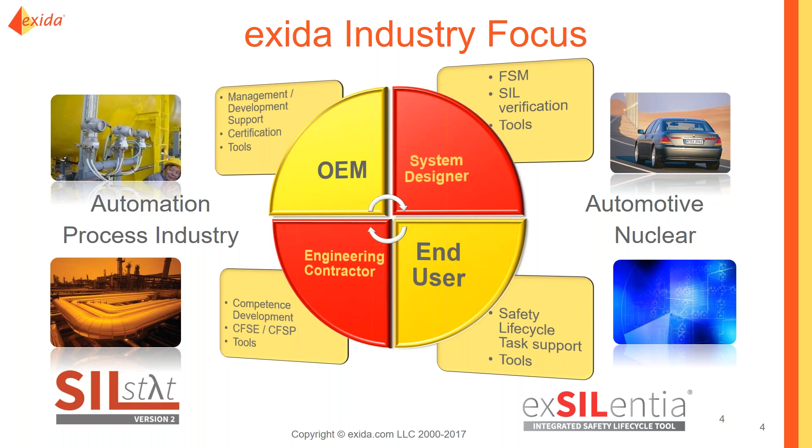We also have products that support the full safety life cycle with exSILentia, and help with the operations and maintenance side through SILSTAT. We also have 3 main service divisions that look after functional safety, cybersecurity, and alarm management. We've worked with a variety of different types of end users, OEMs, engineering contractors, etc., in a variety of industries.

We do provide a lot of information which is free. These webinars that we do is one source, and these are recorded and held on our website under the resources section. We also provide consulting services, the engineering tools, the certification, and training. We provide training in all 3 disciplines of functional safety, alarm management, cybersecurity, and we've also published a number of books and have white papers available, as well as our SERH, our Safety Equipment Reliability Handbook, that has all the failure rates for different types of devices that you would find in process applications.

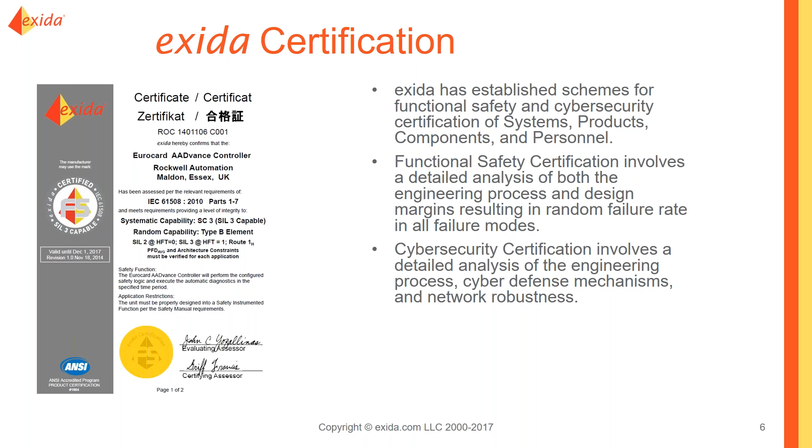We've established a scheme for certification for functional safety and cybersecurity, and that extends now not only to the equipment, but also to personnel, because we have the certified functional safety expert, certified functional safety professional, and now we've introduced the certified automation cybersecurity expert and certified automation cybersecurity specialist, which are equivalent to the CFSE and CFSP, but only on the cybersecurity side.

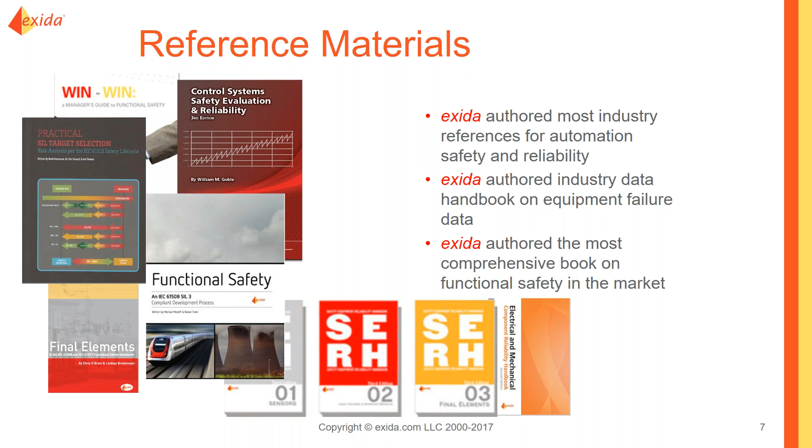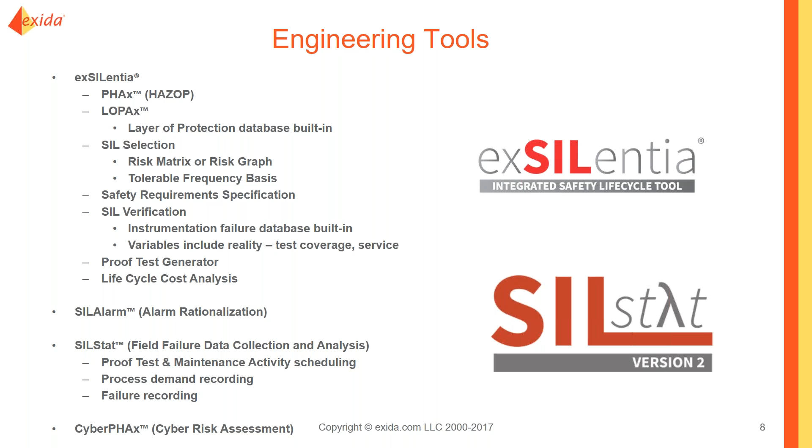In terms of reference materials, I've mentioned the books. We have a number of books that are available through the website, and of course the SERH, which is also available. Engineering tools, we provide the full safety lifecycle tool, which is our exSILentia tool. Some of you may be familiar with it, but it covers the analysis phase, the design and implementation phase, and of course the operation and maintenance phase.

So with that, let's get to the main subject. Do you have a run to fail policy? And if you do, really, why is that? Well, let's look at the objectives of the safety life cycle.

We know that in the past we've had problems with systems where we've had issues regarding, for example, systematic problems. The systematic is the 3 Ps, where we look at the personnel - how well trained are they, how competent are they - the procedures - are there procedures that are being followed - and the paperwork - is there adequate documentation.

So this would apply to, for example, design specifications. Do we have a design specification that has been reviewed correctly, that has been implemented correctly? Is our manufacturing good enough? Is our quality system good enough?

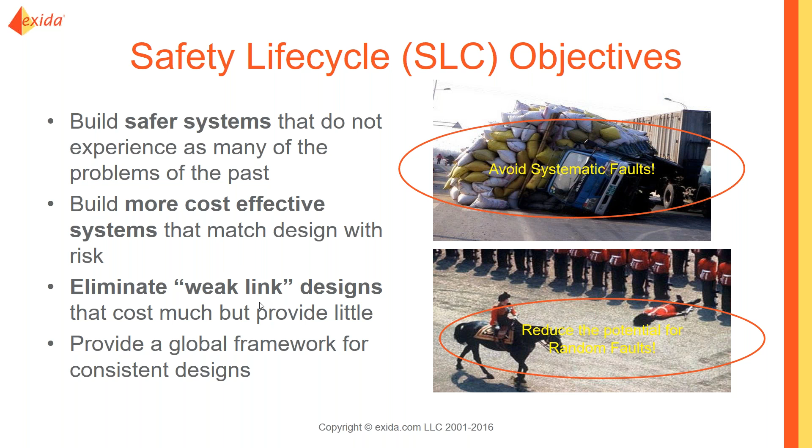Because the point is we're trying to build more cost-effective systems that match our design with our risk in an economic fashion. And also we want to try and safeguard against random faults by improving the product quality as far as possible. So these are the purposes of the safety life cycle. We're trying to get to a consistent methodology whereby we can design and implement a safety instrumented system with safety instrumented functions to achieve the amount of risk reduction and protection we're looking for. So that's the basic purpose.

Now when it comes to how do we calculate and work out what protection we have in terms of our safety integrity levels for our SIFs, our safety instrumented functions, we use what's known as probabilistic calculations to predict these likelihoods of failures. And in the process industry, most of the time we're looking at what's known as low demand, whereby the demand on the SIF won't be any more frequent than once per year, or at least twice the proof test interval.

And then in these low demands we use the probability average. We use a probability of failure on demand average, a PFD average. And that PFD average uses failure rate data. And this is based upon the concept of a constant failure rate during useful life. We're going to look at that in a minute as to what that means.

And of course, constant failure rate is determined based upon either real data or predictive data. And there we now have over 200 billion unit operating hours of data available to draw on. So we can be pretty accurate.

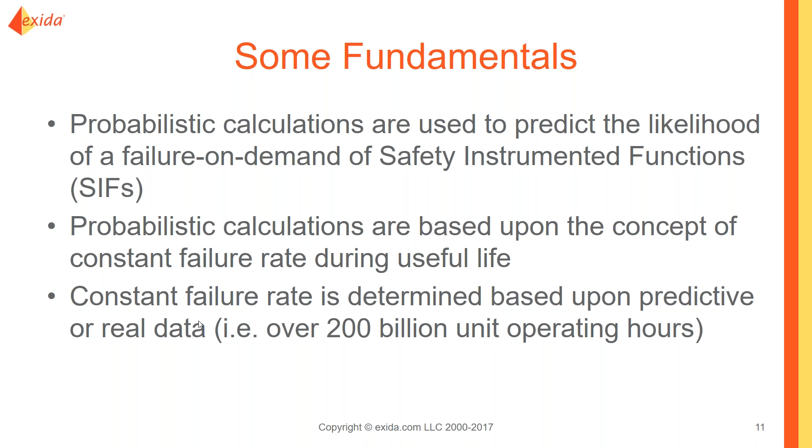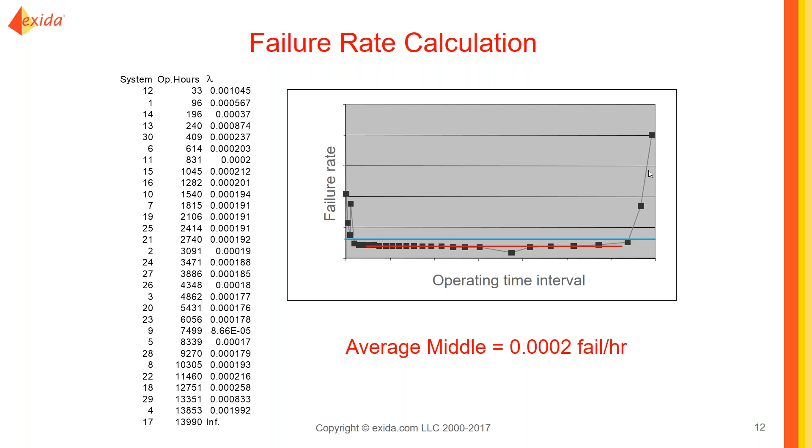And the reason we look at this is because if you consider what's known as the bathtub curve. Typically when we look at failures, and this is something that's been seen consistently, in this case we've taken an example of 30 units and we've recorded how many hours they operated before they failed, and as a result we were able to determine a failure rate over this period of time. And when it's plotted, what you can see is initially we have a relatively high portion of failures, and then it flattens out a little bit, an odd anomaly here, and then at the back end it suddenly jumps up. So why is that?

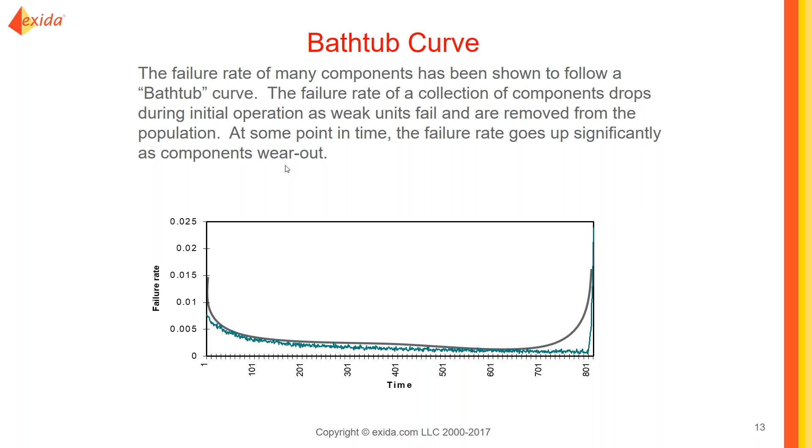Well, the concept of the bathtub curve is that we talk about these front end failures as being infant mortality. These are the units that will fail fairly early on due to weaknesses in the components, and normally most manufacturers, before they ship any product, they will do some form of either temperature cycling, whereby they'll put it in an environmental chamber and they will cycle it up and down for 24 or 48 hours. The point being that these stresses will weed out the weaker units, and most manufacturers want to do that before these units get out into general population, because of course they don't want warranty returns. So the weaker units are weeded out at the front end.

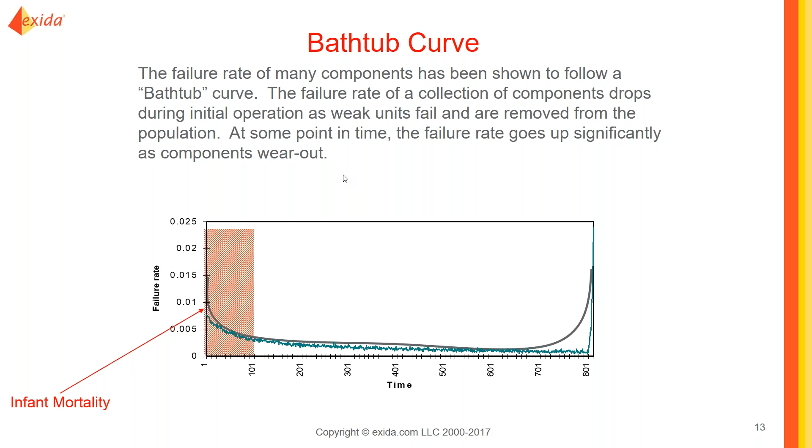But again, at some point the failures are going to go up again, and at this point this is what we call wear out. This is where the product strength has weakened to the point now where the environmental stresses or the normal stresses of operation are beginning to take their toll. And so we see a sharp rise at the back end.

The bit in the middle here is what we use as our useful life. So useful life is when you have a steady, declining, or constant failure rate over a period of time, and as you can see here it's relatively flat. So this is known as useful life, and manufacturers will publish their useful life in their safety manual.

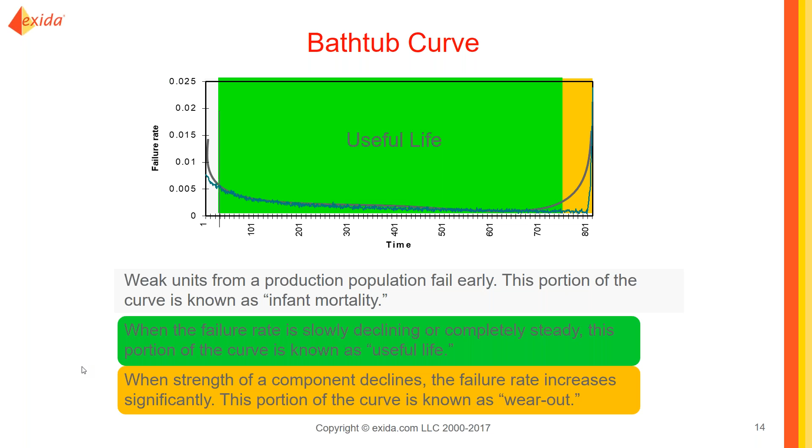People who have been on my training courses are very familiar with my term of RTFM, which is read the flaming manual, because the safety manual has all the relevant data and information you need to be able to design your system.

So from a probabilistic analysis point of view, we take a simple approximation, and what this does is it actually gives us a more pessimistic result. We know that we can weed out our infant mortality through front-end quality procedures such as burn-in, run-in, and even at site when you do the initial commissioning tests.

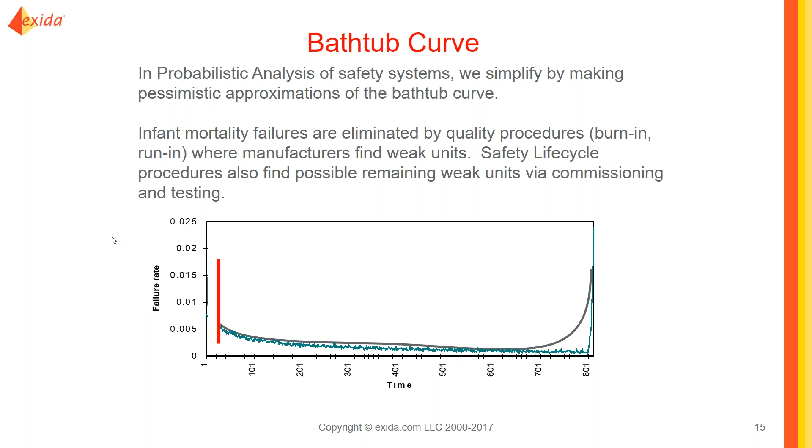Also, through the safety life cycle, we can find these weaker devices by creating proof tests, and we're going to talk about proof tests a little later on. So if you see here, if we take this average and then we approximate here, you'll see we're actually pretty pessimistic. And that's not a bad thing, because we need to be pessimistic, or as realistic as possible. So we take a pessimistic approximation from a constant failure rate based upon this average.

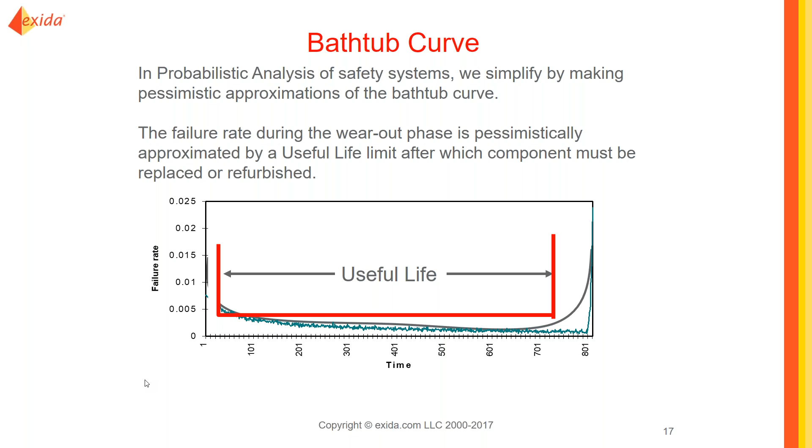So you can see, if we take this approximation over this period of time before we start to rise up, this is our defined useful life. After which you need to replace or refurbish the unit. So the manufacturer, as a result of the IEC 61508 2010 standard change, manufacturers now have to include the useful life in their safety manual.

So taking that then, when we talk about mean time to failure, we talk about the time the device should be operating for before it fails. And again, this is predicated on a constant failure rate assumed during our useful life, in which case we can directly relate our mean time to fail to being inversely proportional to our failure rate lambda. And if we were interested in dangerous failures, then it would be our mean time to fail dangerously, our MTTF-D, would be equal to 1 over our dangerous failure rate, which would be lambda D.

So you can see here a pressure transmitter has a total of 5 times 10 to the minus 7 failures per hour, or what we would say is 500 fits.

Basically we take a measurement of a failure over 10 to the 9 hours, or a billion hours, and so a failure rate per hour would be 10 to the minus 9, which we refer to as a fit. It's just an easier way of representing a failure in time. So we say, in this case, 500 fits.

So obviously if we have 500 fits, what's the mean time to fail? That would be the equivalent of 2 million hours if we take 1 over 500. And that's approximately 228 years if you divide it by 8,760, the number of hours in a year.

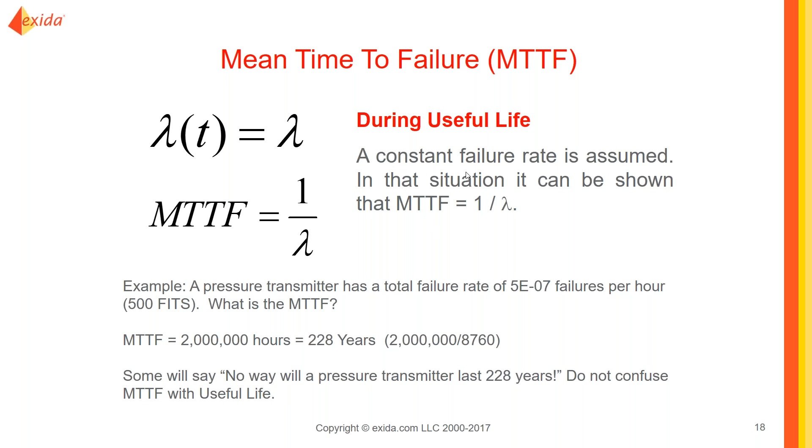Now, of course, this is not saying that a pressure transmitter will last 228 years. It's just saying that the useful life is going to be different from that. So, for example, if you had 100 transmitters, then you'd expect to get a failure every 2.28 years. So this is a different metric compared to useful life. But here again, this is predicated on a constant failure rate during the useful life.

So if we now look at a safety instrumented system with safety instrumented functions, what would the probability of an accident be? Well, obviously if a hazard occurs and the automatic protection function operates, then we don't have an accident because we've prevented it. But if a hazard occurs and the function fails, then we're likely to get an accident, because remember, our safety instrumented functions are our last line of defense most of the time.

So we need to know the probability of failure of that function. We could say that the probability of our hazard multiplied by the probability of failure on demand of our SIF would be the probability of the accident. The question then becomes, what is the probability of failure on demand of our safety instrumented function?

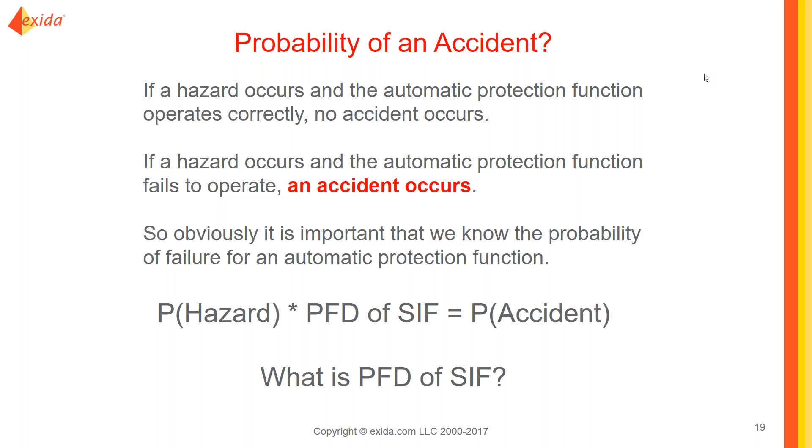Here again, when we're doing the probabilistic analysis or the SIL verification, we look at the whole SIF. So we're looking at the sensors, any interface devices such as interposing relays, barriers, etc., the logic solver, and any interfaces between the logic solver and the final element. All of that needs to be considered. And we work out usually the individual probabilities of failures on demand and then add them up to get an overall figure.

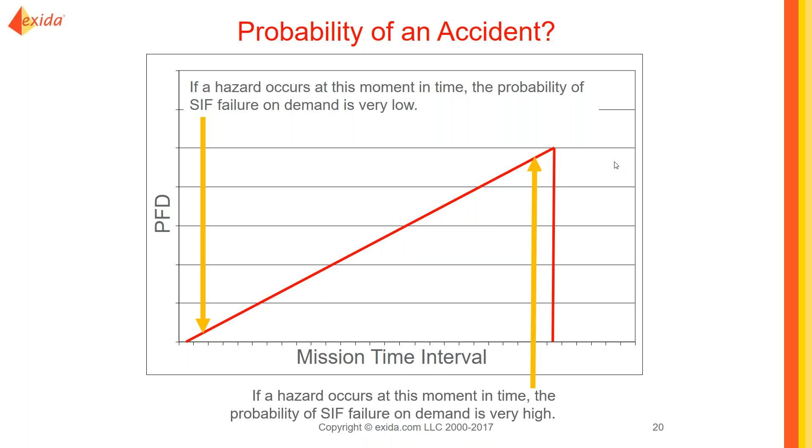So if the demand occurs here at this point in time, the probability of failure on demand is pretty low. However, if we get a demand here and we have a failure, this would be a very high probability of failure on demand. So between these two, what value of PFD do we use?

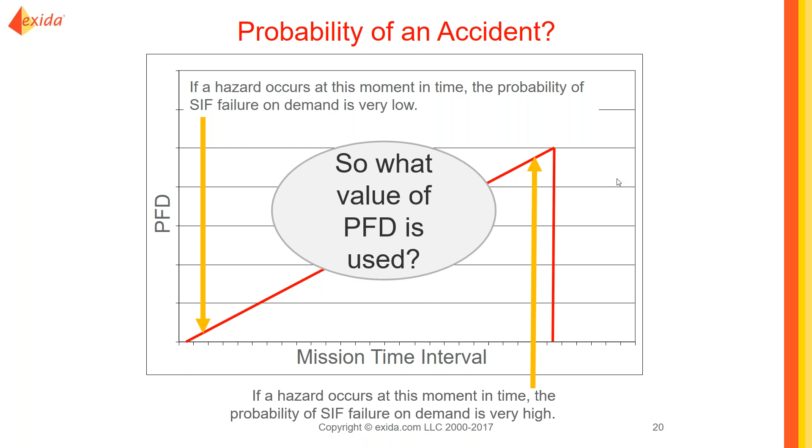And here again, what we say is failures are normally independent of demands by virtue of the fact that when we look at an independent protection layer, the justification for saying it's an independent protection layer is that it's independent, meaning that if it fails, it cannot propagate a failure to another independent layer, and that fails too. So the two can't fail together, they have to be independent.

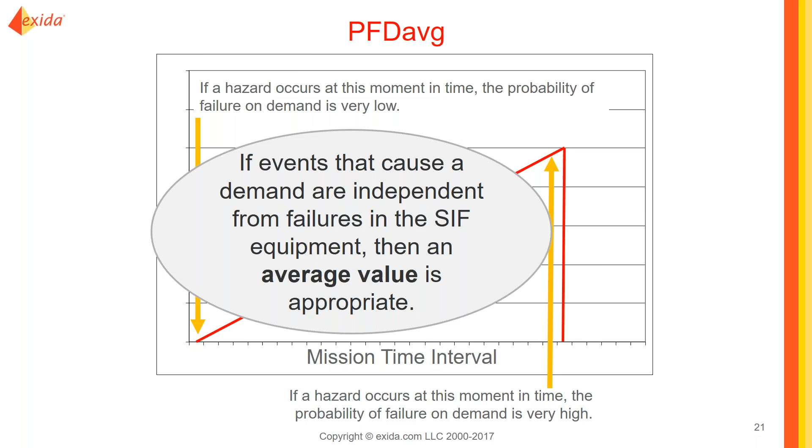So that's why we say if the events that cause a demand are independent from the equipment failures, then coming back to our constant failure rate during useful life, we can take an average value. So if we look at how do we calculate this, it takes you back to your calculus, the area under the curve has to be calculated using an integral function. And this is the premise of Simpson's rule.

So therefore, if we're looking at calculating a PF average, we need to look at the area under the curve. We need to integrate between 0 and t in our example. So the formula would come out to be the PF average is 1 over t, integral of the probability of failure for time with respect to time, assuming constant failure rate again during useful life, this flat part of the curve.

Then if that's the case, we can say that our PFD average now is approximately lambda d, because it's a failure on demand, so it's a dangerous failure, times our test interval divided by 2. So this is what we call the simplified equation.

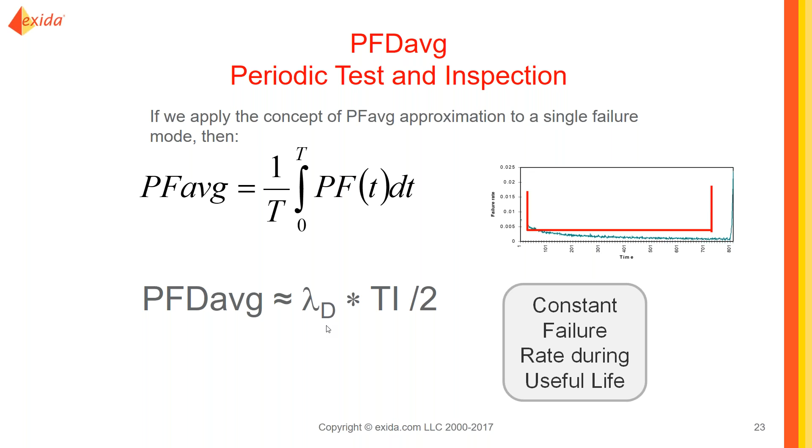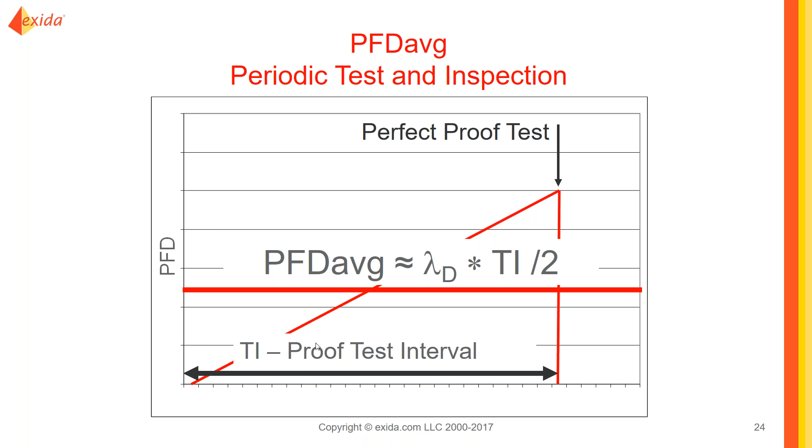It's an approximate equation, but it's for low values of lambda, that's true. And the reason we can say this is because of this constant failure rate over the useful life. Now if we look at this a little more closely...

When we talk about probability of failure, we know it doesn't have any units, but it does use a time period. Failure rate is different, but because failure rate is given in units of failures per time, this is where we come into our fits. We always use a failure per hour for our analysis. This is the smallest unit of time which is relevant.

So even though probability of failure doesn't have units, it has to be done for a given time period. And of course, failure rates are the number of failures in a given time, usually per hour. So we use this per hour.

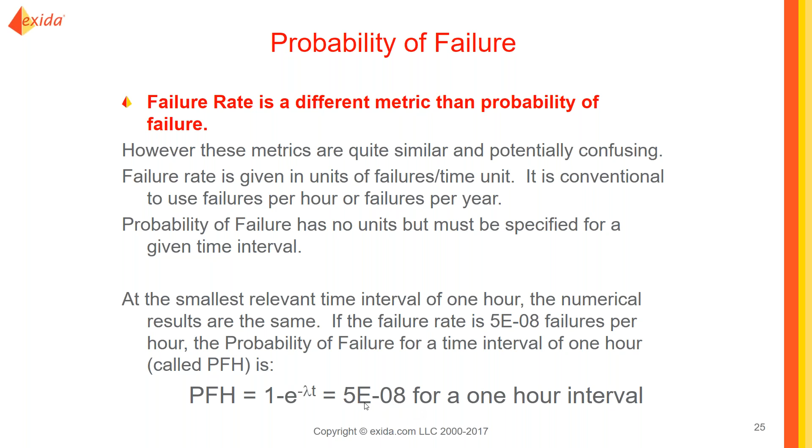So for example, if the failure rate is 5 times 10 to the minus 8 failures per hour, or in other words, 50 fits, the probability of failure for a time interval of 1 hour, therefore, would be using our formula PFH equals 1 minus e to the minus lambda t, and that would give us our 5 times 10 to the minus 8, or 50 fits for a 1 hour interval.

So again, coming back to the useful life, we can calculate a longer time interval using our rules of probability combination.

And this is where we can use our complement rule, where basically the probability of success would equal 1 minus the probability of failure, and likewise the probability of failure would equal 1 minus the probability of success.

So if we come back to the terms reliability and unreliability, in reliability engineering, we use this one's complement, as I just said. The probability of success or reliability would be 1 minus the probability of failure, and vice versa.

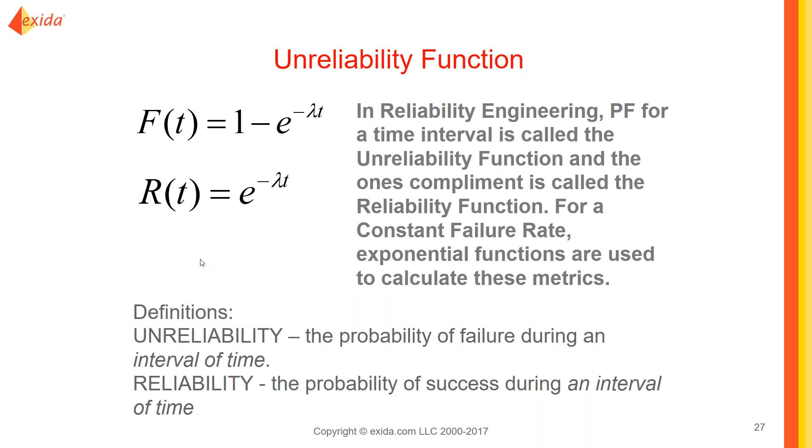Here again, constant failure rate. We could then use our exponential functions to calculate our metrics. And here again, this goes back into a lot of the calculus, but we're basically dealing with the area under the curve, and so we have to calculate that particular range.

Also here, from math, we can approximate by a series of other functions when it comes to looking at this.

E to the x is equal to 1 plus x plus x squared over 2 factorial plus x cubed over 3 factorial, and so on. Now, if you can't remember what factorial is, 2 factorial is 1 times 2, 3 factorial is 1 times 2 times 3, 4 factorial is 1 times 2 times 3 times 4, etc. So you get the idea.

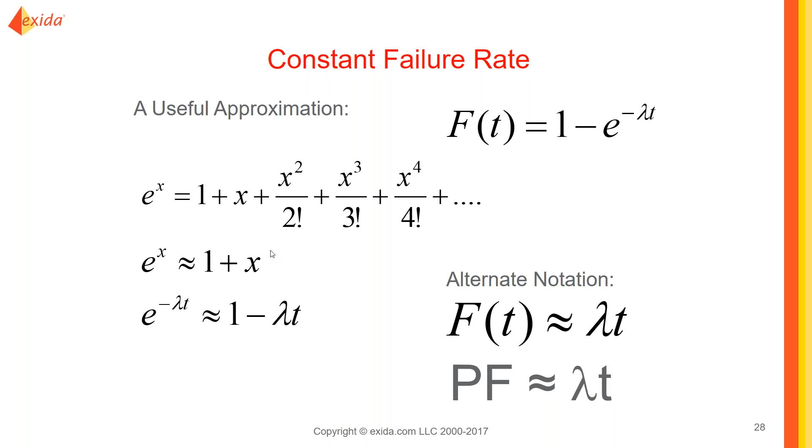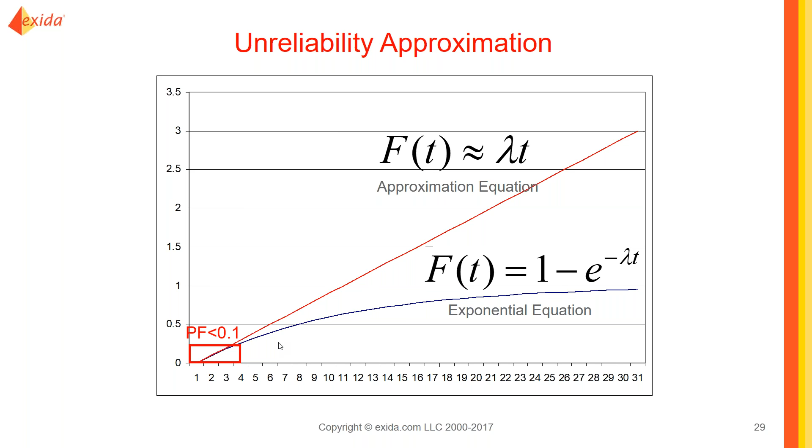And hopefully that's fairly straightforward and easy to see. But again, these are all predicated on this constant failure rate during useful life. So if we plot our approximation against our exponential equation, you can see that if we have probability of failure less than 0.1, then these two are relatively the same. So we won't have a significant error when our probability of failure is less than 0.1. And generally, when we're looking at constant failure rate during useful life, these tend to be very small numbers.

So here again, our variable t represents our time interval of operation. And of course, the longer the time interval, the higher the chance of failure. So this is what we would call our mission time. And here again, mission time shouldn't be confused with useful life, because mission time would be the time that the end user defines for the safety instrumented system.

So sometimes end users will look at mission time and say, well, we have these final elements, and these final elements have to be refurbished or replaced every 10 years. And since these final elements are the biggest or most difficult things to replace and refurbish, we might set our mission time at 10 years. However, other equipment, some of the sensors, for example, may have a useful life of 5 years.

So if we have a mission time of 10 years and the sensors have a useful life of 5 years, then we need to replace them every 5 years. So this is the difference. The mission time is chosen based upon end user practices.

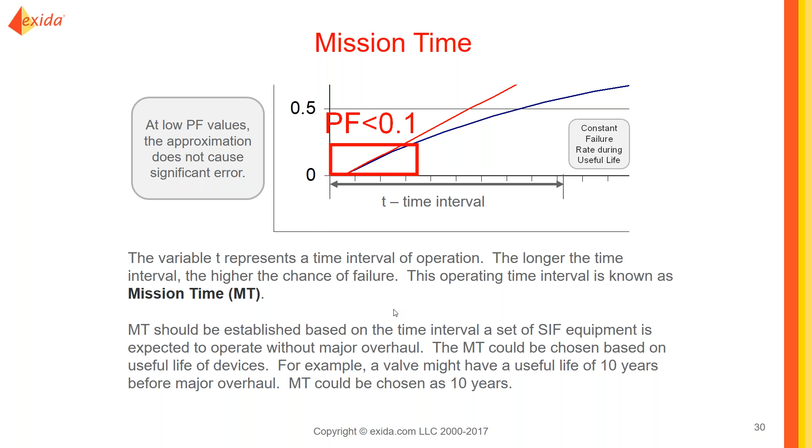But mission time is different from useful life. So again, if we give an example here, a plant has operated for 5 years continuously. The process unit has to last for 50 years before complete replacement. Some of you may question that, but this is just an example. So at the end of each 5-year period, the unit's shut down and overhauled.

So of course, devices performing the safety function have been given the following useful life, which is again identified in the safety manual. The pressure transmitter is 50 years, the actuator's 10, solenoids 5, gas detector 2. So here again, we have to overhaul or replace these devices before the end of their useful life.

So what mission time do we use? 5 years might be a good choice, but gas detectors have to be replaced while the process is online. And therefore we've got to consider bypassing and how we would design bypassing into the system for those devices. Or we would have to think about possibly having a redundant architecture to enable us to do that.

The solenoid valves themselves will be replaced every shutdown, again based upon economics. And the actuators are likely to be overhauled every 2 shutdowns. The pressure transmitters, in this case, would be replaced at least every 10 shutdowns.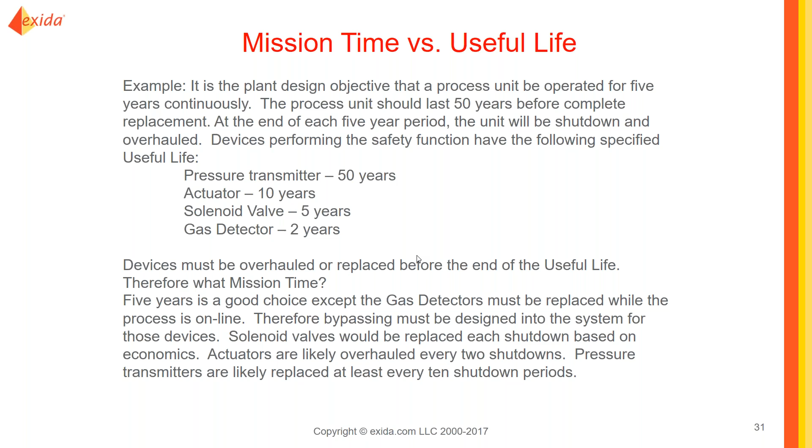But because there's no such thing as a 100% perfect proof test, you need to consider how much you can achieve. And what you'll find is that, in general, logic solvers can achieve very high levels of coverage, 98%, and certain smart transmitters can too.

Problem always comes with the final element. Because of the nature of the beast, you're not going to be able to design a proof test to get that higher coverage on a final element. You might get 60–65% if you're lucky.

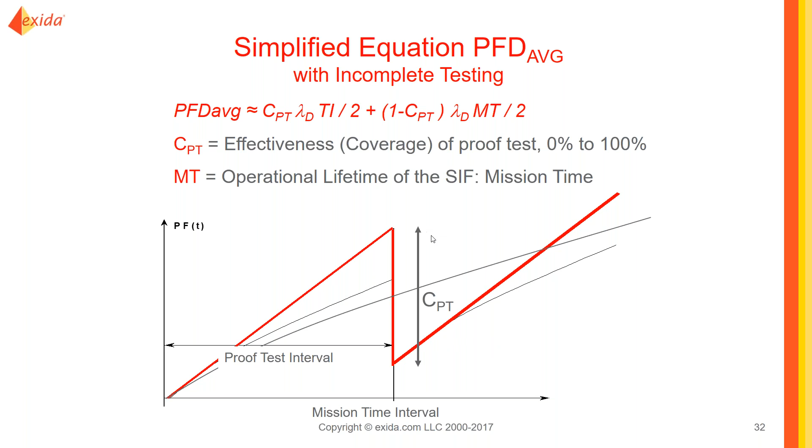So just to summarize, the probabilistic analysis that's done when we do a PFD average calculation, or even a PFH, is based on the fact that we're using that constant failure rate during the flat portion of the bathtub curve. That's the useful life portion. And that, as I've said, is because we take the average over that useful life. It's a slightly more pessimistic approach, but it gives us pretty good results.

And when we do PFD calculations, we're looking at, for low demand, the PFD average for the reasons we've stated. Again, constant failure rate—we need to know where's a good point to take, and we use the average value to take as our probability of failure on demand. The problem with run to fail is it ignores this useful life, and then it extends into the wear out portion of the bathtub where it's no longer constant and it's unpredictable.

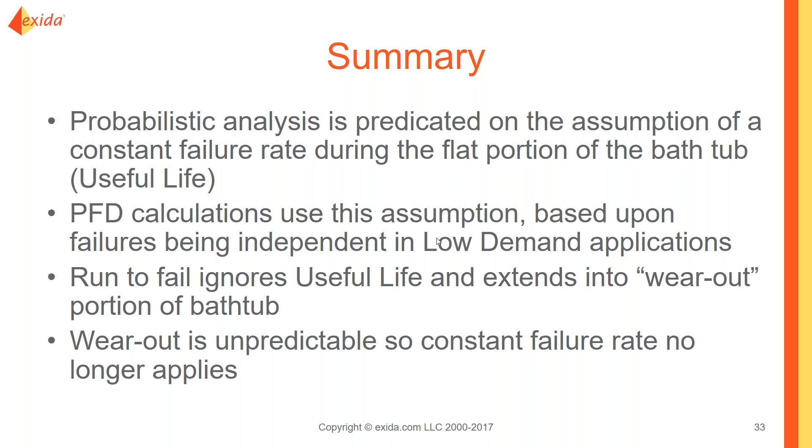So we can't use that concept. Our MTTF becomes invalid and our PFD average becomes invalid. So we no longer have good reliability. This means, of course, that the SIF integrity is going to be compromised during the wear out. So you will not be able to say you still have a SIL2, for example.

This is something that people don't understand. When I usually teach the class, I ask, does anybody here have a run-to-fail policy? And sometimes I get people saying, yes, we have that. So the culture really is important to understand, because yes, replacing equipment is not easy or cheap. But again, if you choose your equipment carefully, you'll have good numbers, good reliability, and you need to include that as part of your mechanical integrity.

Proof testing, of course, is another thing that helps us maintain the SIF's integrity during the useful life and eventually over the mission time of the safety instrumented system. But here again, proof testing just gives you that opportunity to try and find potentially dangerous faults that your automatic diagnostics cannot find. So that's something that needs to be considered.

Therefore, mechanical integrity programs should account for this useful life and should have a parts replacement program or a refurbishment program. As I've said, this is normally down to the end user's practices and policies. So here again, you may say that every 5 years we have a full plant shutdown and we'll do a full refurbishment of our final elements.

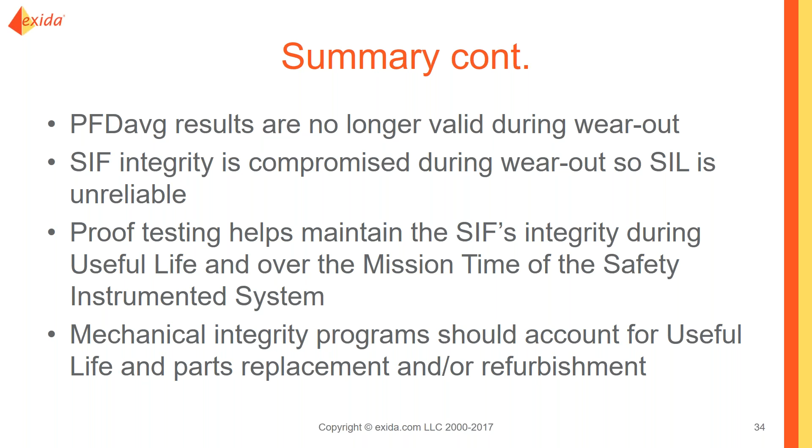Okay, so that is the end of it. Anybody have any questions? I've seen a couple. Let me ask this: any of you want to privately let me know whether you have a run to fail policy or not at the moment?

Yeah, I don't see anybody coming forward. It's either good because you don't—I see them now, okay. Well, that's good, somebody says they're in the process of changing. I'm glad to hear that. There's another one, my question may have come to... Okay, so I might have another question later on.

A lot of people get confused between useful life and mission time, and they often say to me, what's the best mission time to use? It really comes down to the type of process, the plant itself, and your mechanical integrity program. Valves, depending on what they are, need to be considered for when they have to be refurbished or replaced. If it's an ammonia plant or severe service, and the valves aren't chosen carefully enough, you could end up having a lot of reliability problems.